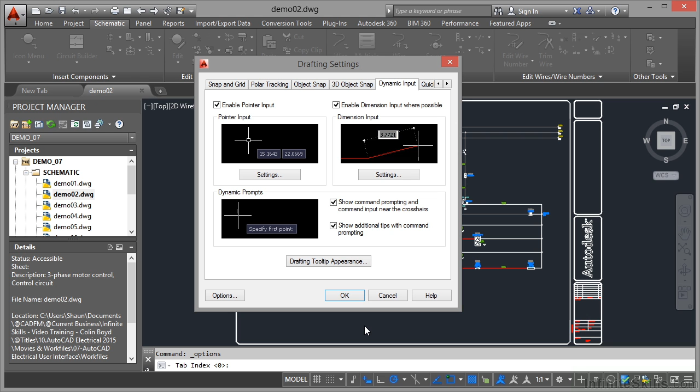Now, once all those settings are set up, how do we utilize dynamic input effectively? So I'm just going to cancel that. We've looked at various ways of using dynamic input just generally, but what about with something like an AutoCAD electrical command? I'm going to zoom in on this area here.

I'm in Drawing Demo 02 again in the project Demo 07, and I'm going to zoom in here. So I've got a little bit of space between those wires. I'm going to go to the Schematic tab on the ribbon, and I'm going to go to Insert Wires, Wire Numbers, and I'm going to click here, and then click on the Wire command.

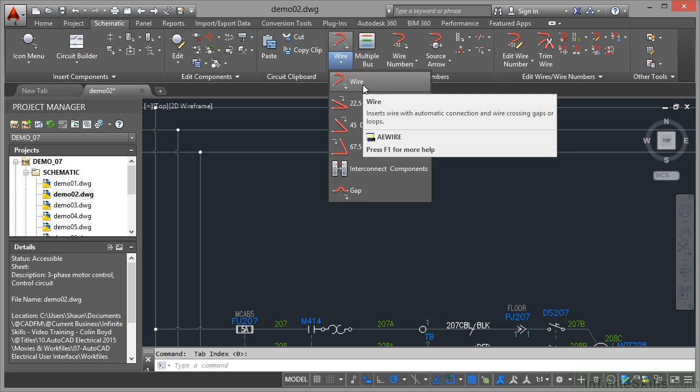As soon as I come in, the dynamic input is prompting me to specify where that wire is going to start. But look down at the command line as well. I've got wire type and also show connections. So if I've got a connector or a PLC, I could just type X or click on that command there on the command line, and AutoCAD Electrical would show me the connections.

But what I really like about this is it's there in front of you. Dynamic input is part of what they call heads-up design from Autodesk. And the trick is you're looking at your design, but you're also getting prompted about your design by having dynamic input switched on. You're not having to look at the command line all the time. It's a bit like watching a foreign movie where you're looking at the subtitles at the bottom of the screen rather than watching what's actually happening in the movie itself.

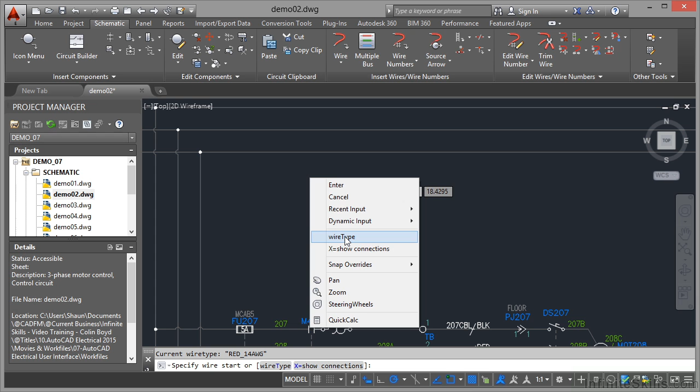Now, you'll notice as I move around like this, I can specify where the wire starts. You'll notice I've got those prompts on the command line, wire type or show connections. So if I right click, I can go to wire type there on the shortcut menu. That'll bring up the set wire type dialog box. And at the moment, I'm using red 14AWG, and there's the layer name.

So let's change that. Let's go for a different one. Let's go for, let's say, that one there. I'll go for blue and I'll OK that. So I've changed the wire type. So now I click. And all I've got to do now is drag where I want that wire to go and click again. And you'll notice this time it's blue because I've changed the setting. So I press enter and that's done.

And as soon as I press enter and finish that particular piece of wire, AutoCAD Electrical is prompting me via dynamic input to specify the wire start for the next one.

Now, dynamic input also gives you another way of getting to your shortcut menu. I don't have to right click. Can you see on the dynamic input prompt, it says specify wire start or, and there's a funny little symbol just before the coordinate readout there. That is actually prompting you to hit the down arrow on your keyboard. So there is actually a keyboard input available as well.

So if I press the down arrow, you can see there that I get another menu. So there's another way of utilizing your dynamic input in AutoCAD Electrical. You'll notice this with AutoCAD, there's normally 3 or 4 ways of doing the same thing. And all I've got to do here is select Scoot, Wire Type, or Show Connection.

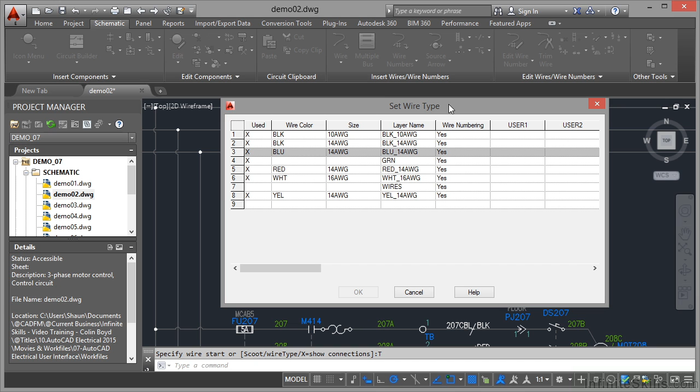So if I click on Wire Type there, it's the same dialog box again, and I pick the wire types. Let's go back to our red one, click on OK, and this time when I place the wire, drag, click, it's the red wire type, enter to finish, and there's the prompt again.

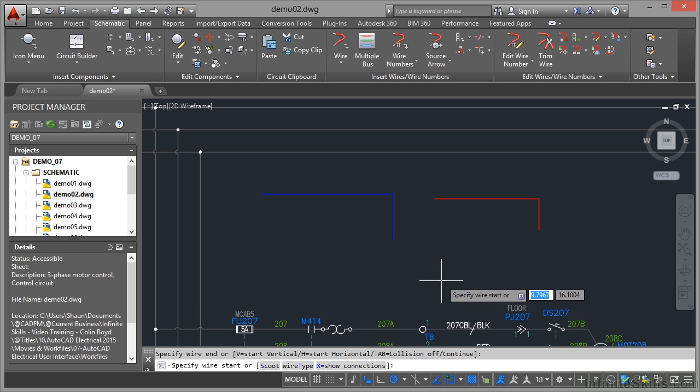So that dynamic input is very, very useful, especially with that down arrow key, because all the menu is there on screen in front of you. You don't have to right click, you can use the keyboard instead. More importantly though, you can also use the command line. So I can come down here and click on wire type here, and again I get the set wire type dialog box. As I said, there's at least 2 or 3 ways of doing things in AutoCAD Electrical. Utilize your dynamic input and make sure your dynamic input is always on. It's so much easier to work because you see all the prompts on the screen in front of you.